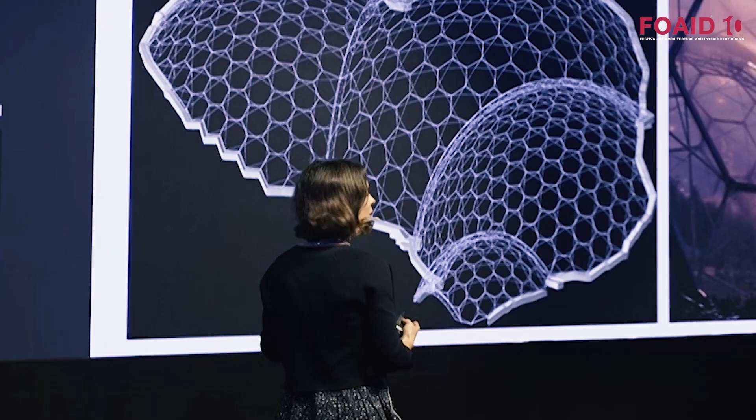The idea for the Eden biomes was very much, and it's actually really explicit of how Grimshaw work, in taking a very constraints-led approach, starting from basic principles and moving on to come with an idea which is again born out of the function and the needs of the building. And in fact, Grimshaw as an office has made a pledge to try and make all our projects net zero carbon by 2030.

I've been with Grimshaw since 2011, and Grimshaw is, as many of you might know, an international global architectural company. We have offices in Australia, in New York, in the US, and also in Dubai and in Paris, as well as the key office being in London.

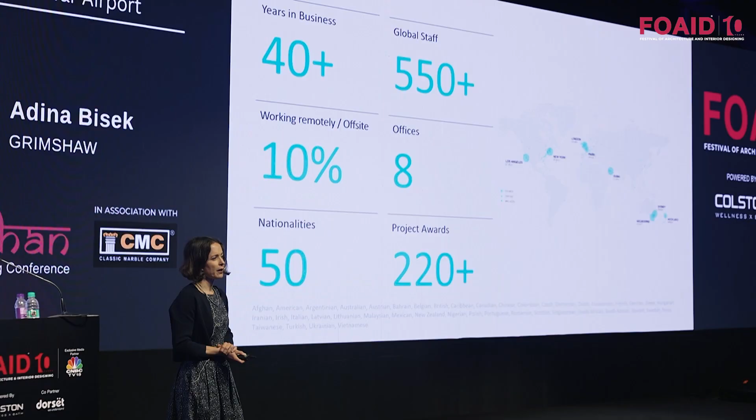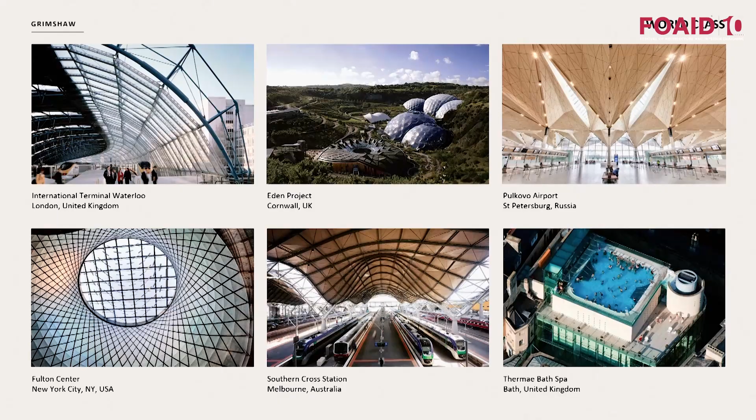We've got about 550 staff, and really the focus of the company very much is the creation of high quality, world-class projects. These arise from collaborative working. We really believe as architects that we can design buildings together, collaborative working, contextual responses, and really driving forward innovation in design. We approach our projects with the idea that we have to find unique solutions to all the different challenges that they pose us.

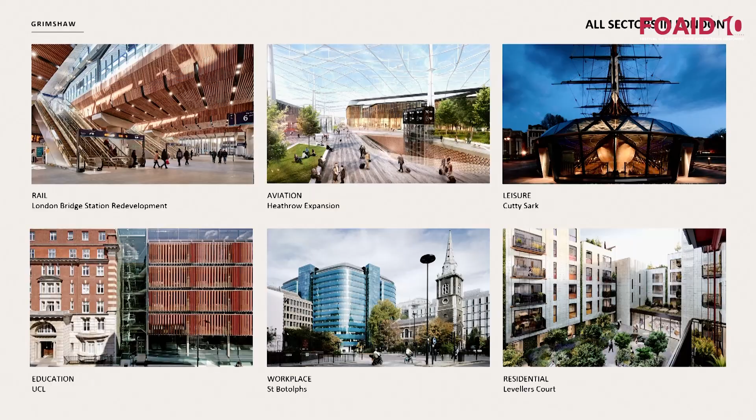And obviously, Grimshaw is a multifaceted company. We work across different scales of projects, different sectors as well, and different typologies. And here are just some of these examples.

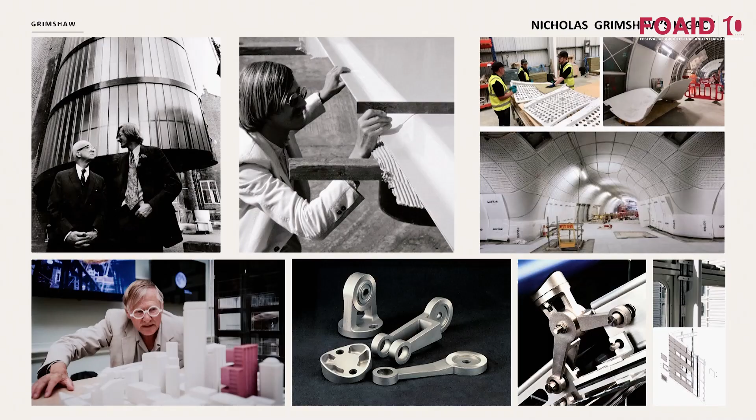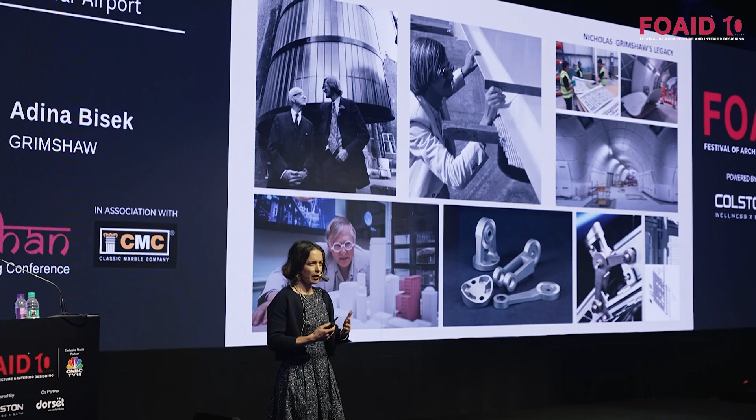Now, all of this really comes from Nicholas Grimshaw. He's the founder of the practice. Nick had a real sense of the technical, the functional aspect of design. He really felt that buildings should demonstrate their purpose, that they should be explicit in what they stand for and the purpose that they fulfill. And then the idea was that form follows on from function.

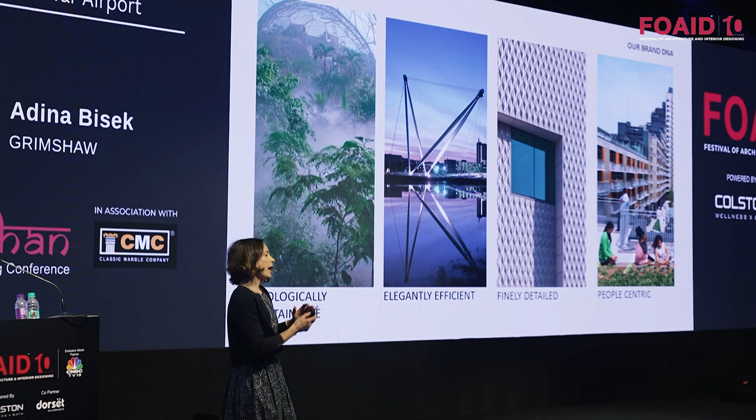You can see, obviously, Nick has retired now, and these are just some images of the time when he was very much the key architect and very much involved in the business. From Nick's ideology has come forward our brand DNA, our approach to design.

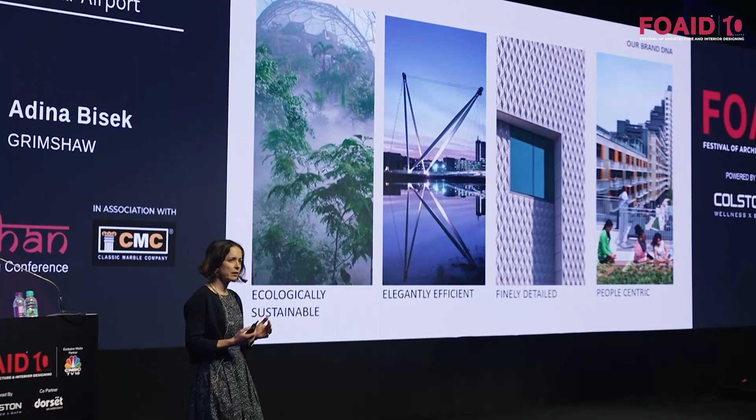First and foremost is obviously the idea that buildings have to be ecologically sustainable. In this time of climate emergency, we absolutely cannot ignore sustainability, ensuring that buildings are foremost really achieving net zero carbon. In fact, Grimshaw as an office we've made a pledge to try and make all our projects net zero carbon by 2030.

Next is the idea of making buildings which are elegantly efficient, ensuring, again, going back to Nick's ideology about ensuring that they are very much performing to the best of their ability and being elegant about it. That elegance in design very much comes from the finely detailed aspect. When we look at design, we consider all aspects of that building in very, very careful detail, and that starts to show in our final projects.

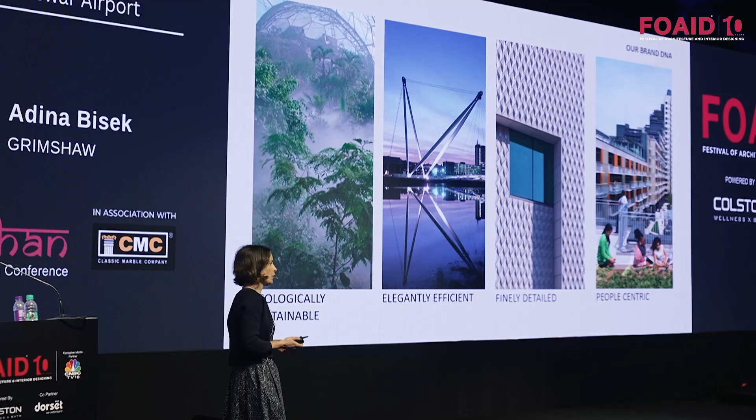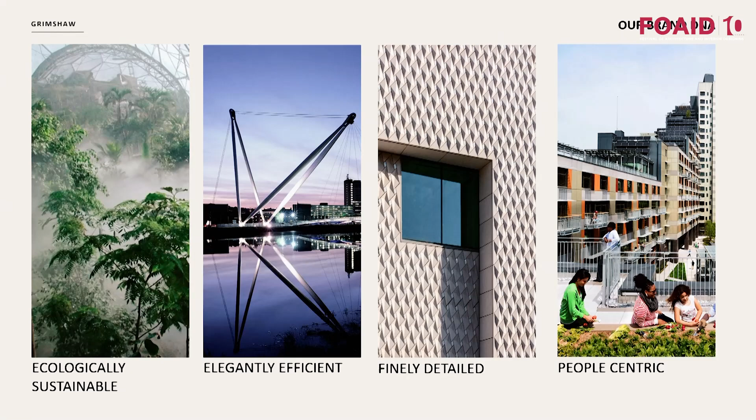And mostly, and in fact just going back to what Rob said this morning, people are critical to our projects. All our projects are people-centric. We need to make sure that we have the sense of the user, the end user, in mind at the time when we design. So these are the sort of key ethos of the company.

And obviously within there, this idea of infrastructure and place. Infrastructure and place also has a sort of sense of global and localism in there. Global because the provision of infrastructure is so paramount to projects, to ensure that they perform to the highest of their ability and making sure that they have all the provision of services that they need, but then taking that science of building and then making it very local and place-specific. And that's what gives that kind of unique quality to architecture and to buildings as well.

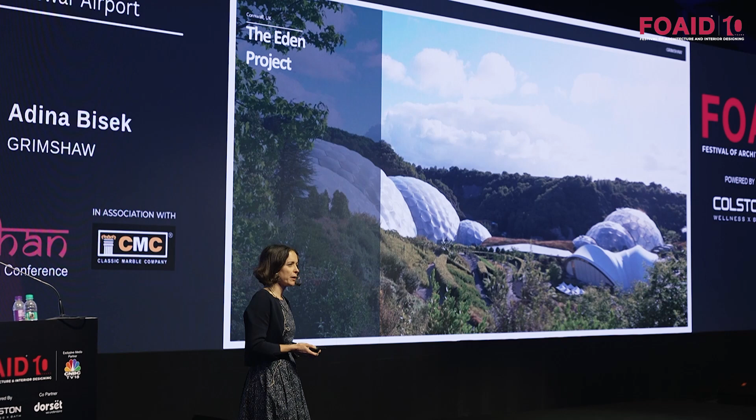And that's what I want to focus on today, and I will clearly demonstrate this from two projects. The first one obviously being Eden. I don't know how many of you know it, it's obviously now a very iconic, it's an old project. It was built in the 90s, but it has really been a signature project for Grimshaw.

Now, the Eden project, if you essentially think what is it? It is essentially a greenhouse for plants. When the client came to us, what they wanted was a place for global biodiversity, a place where plants could be exhibited, a place to entertain and to educate as well. But more than that, they wanted two biomes, one to have the humid rainforest plants, and the other for Mediterranean temperate plants. They also wanted another enclosure which was more open for temperate plants. So the idea was to have these enclosures to exhibit plants, to educate and to entertain.

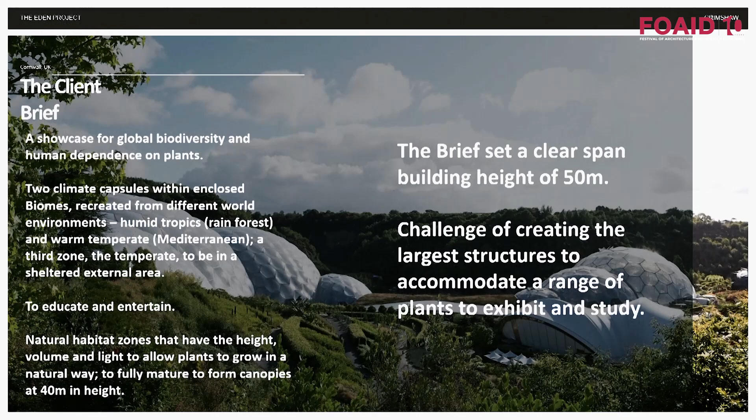But more than that, what the client wanted was for the plants to reach their full height in their maturity, and that was essentially designing to accommodate something which could have a canopy size of about 40 meters. That set the parameters for our building size to be about 50 meters, which meant that we were looking to design one of the biggest glass houses in the world at that time.

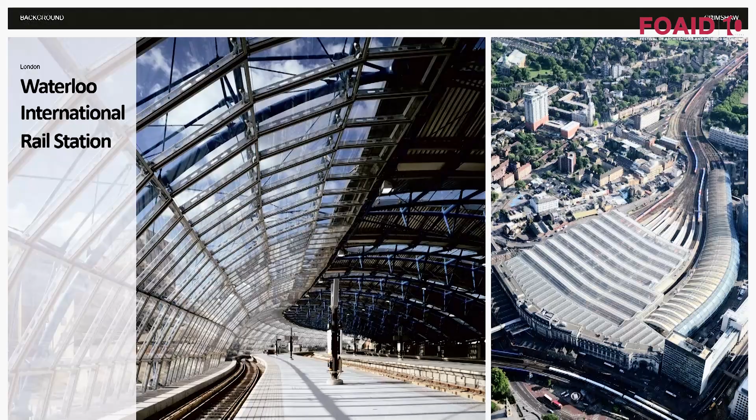Keeping that challenge in mind, the client also came to us because at that time we had just finished the completion of the Waterloo International Rail Station in London, which was the first Eurostar gateway to the UK from Europe. This was a real icon for railway architecture, signifying a new renaissance for high-speed links and a gateway to the UK.

The challenge there had been to create this sinuous roof form which would follow the track alignments. Working with engineers, we developed a glass size that we were able to repeat across the sinuous form, creating this kind of snake-like structure.

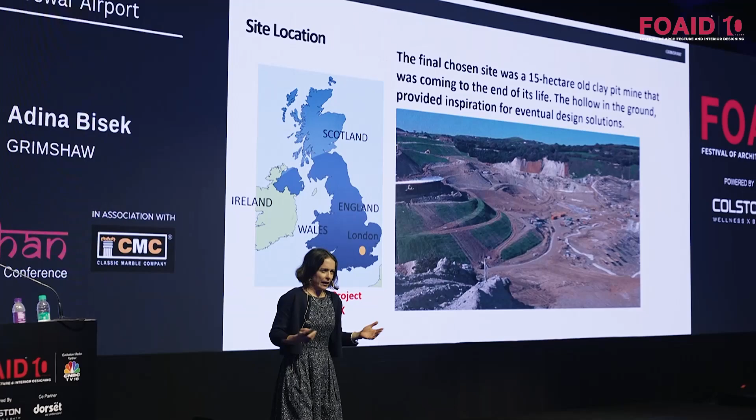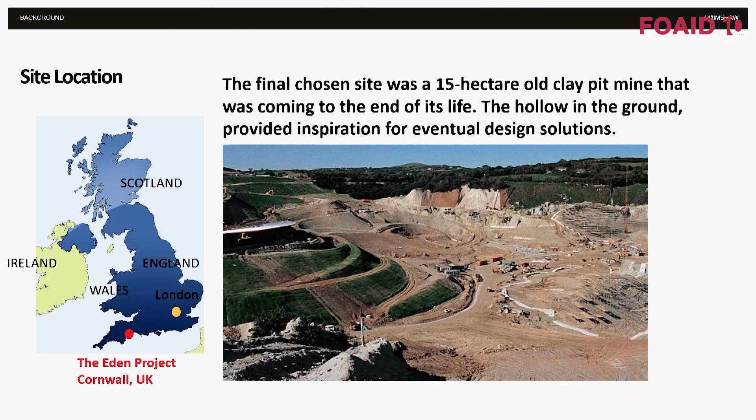So the client took that and wanted it to be a prototype for the biomes at Eden. They went through a site selection process before they came to us, and eventually chose this particular site in the west of the country near St. Austell. This was actually an old clay mining pit coming to the end of its life, and the idea was this would create a fantastic place for the Eden project.

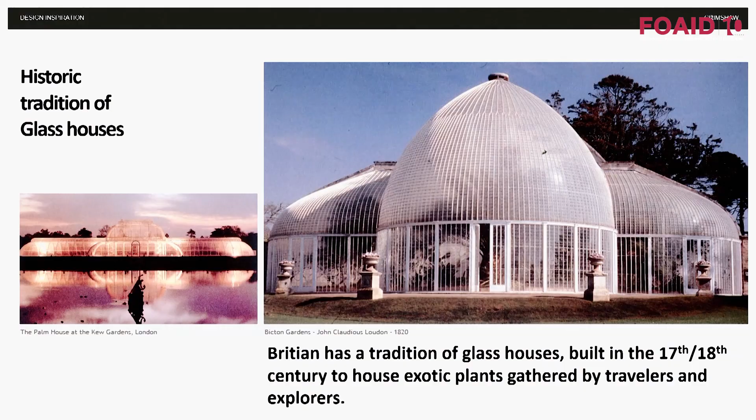So we took inspiration from that hollow in the ground and went back to first principles, starting to understand the evolution of greenhouses or glass houses in the world. We went back in time to the 17th, 18th century, when glass houses first came to being.

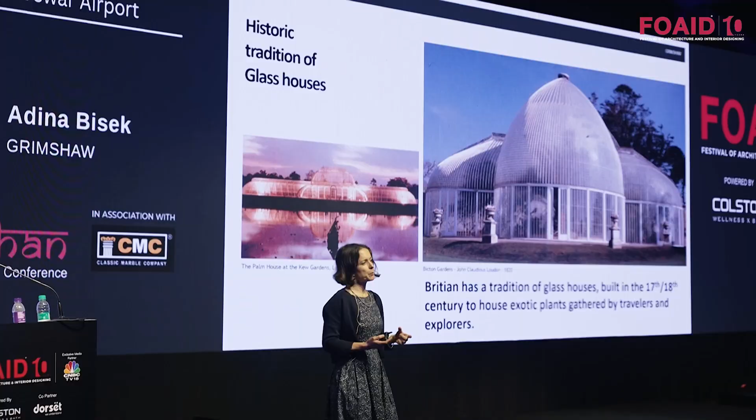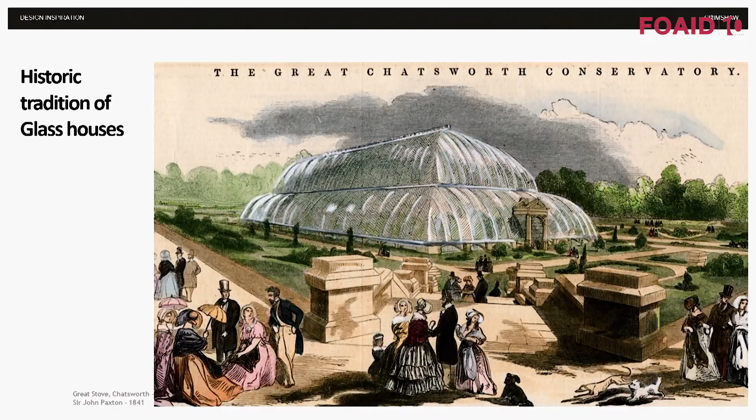This was the time when explorers and adventurers were going out exploring the world and bringing back tropical plants to the UK, which had to be housed in very protective environments. This one is in Chatsworth by Joseph Paxton, built with wood and glass. Paxton was particularly known for industrializing this process, looking at ways it could be prefabricated, and at economies and speed of construction.

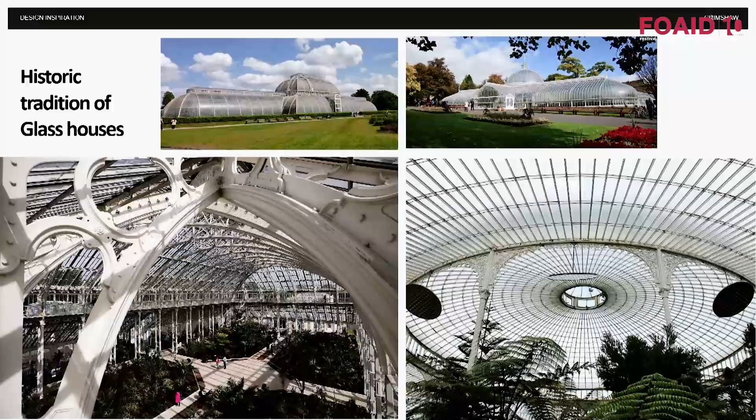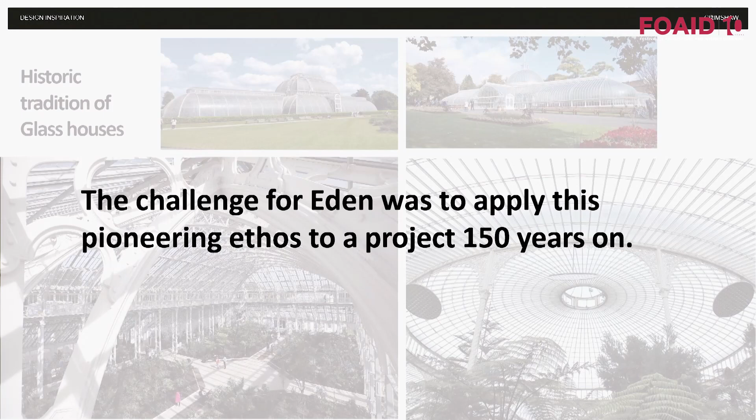In industrial times, wood was replaced by steel, so you started getting steel, iron and glass structures like the ones you see here - famous examples like the Palm House in Kew Gardens and the Kibble Palace in Glasgow. These are beautiful, large structures with beautiful quality of light, and they became icons at that age. So the challenge for us was how to create the next typology of greenhouse, taking on that tradition the Victorians had set 150 years before.

As we all do, we looked at the site for inspiration, and this was not an easy site. At the time the designers were looking at it, it was at the end of its life, so the topography was still changing. But we thought it would be nice to create these biomes using the walls of the site as part of the architecture, working the site with the architecture, and going back to Waterloo to see how those arches could be married into a structure.

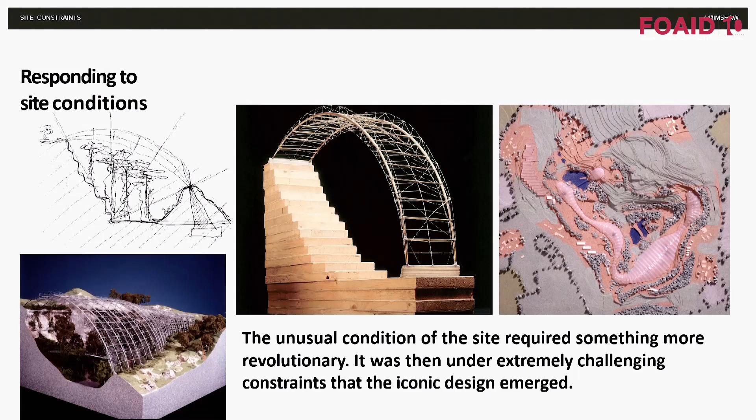You can see this is one of the plans which was coming up at that time, with this kind of sinuous quality.

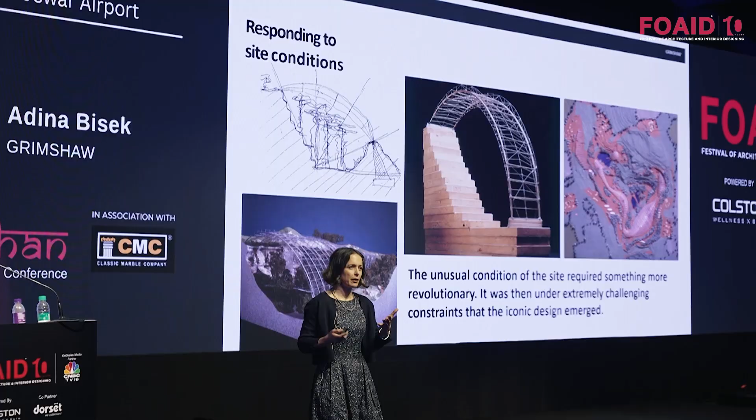But a major challenge was that because the site was still changing, we needed something much more flexible and something which could also be logistically transported to Cornwall. The steel trusses we had used in Waterloo were basically too heavy to be transported.

Inspiration, influences and ideas come from various places, and the teams had been encouraged by this film from the 1970s called Silent Running. In the film, they have these lightweight biomes which float in space, and we thought - can we make something as lightweight as that?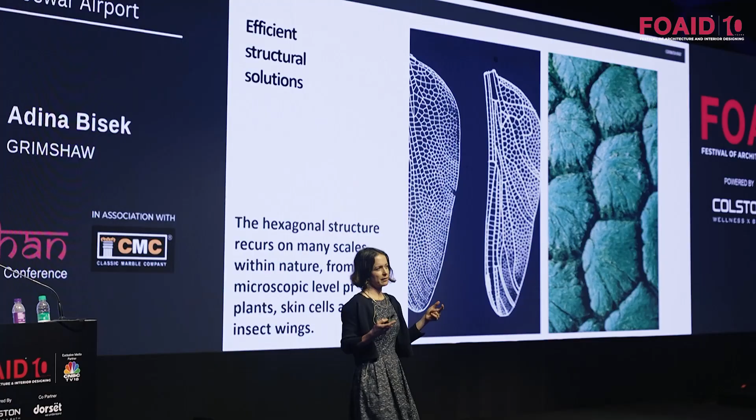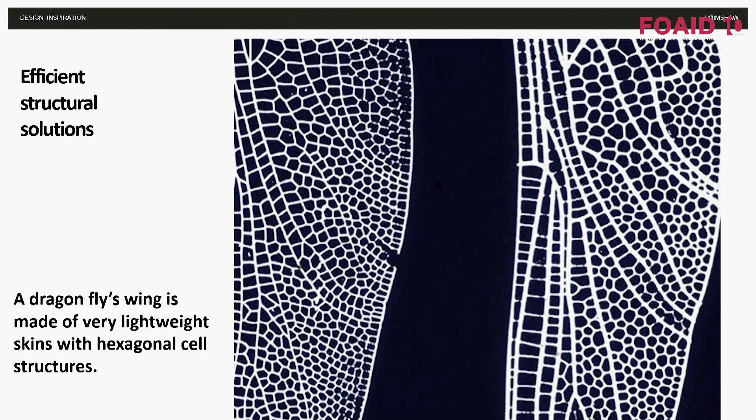Nature can also be a fantastic place for inspiration, especially if you look at honeycombs. The hexagonal structures are really robust, with careful use of resource and minimum use of energy. These hexagonal structures exist across many scales, from microscopic organisms all the way to insect wings. Especially when you look at dragonfly wings, you see the hexagonal structure, and the way it's attached to the primary structure is also at right angles, which was really critical for us in developing that structure for the biomes.

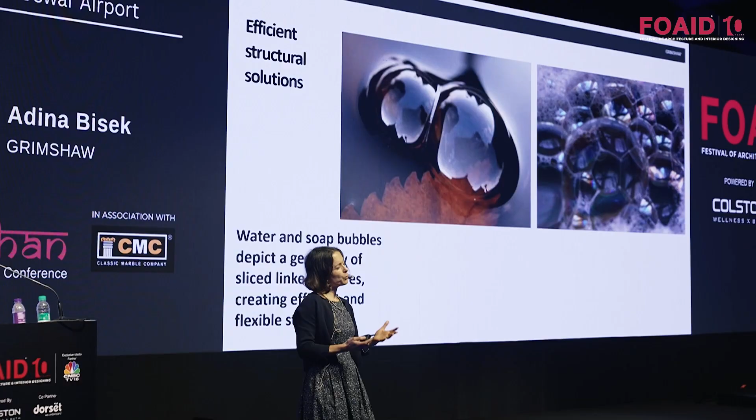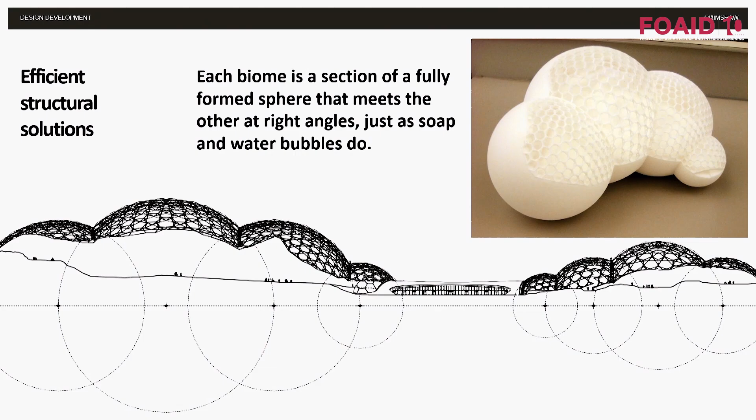Sometimes you can get inspired by water and soap bubbles. When you look at water and soap, the structure is actually partially sliced spheres which come together and attach each other at right angles, and this started to give a sense of what the biomes could actually look like. So here you can see how the biomes are cut slices of spheres which come together and attach at right angles. The seam where they're attached is the critical bit of the structure taking the load, allowing the rest of the biome structure to be really lightweight.

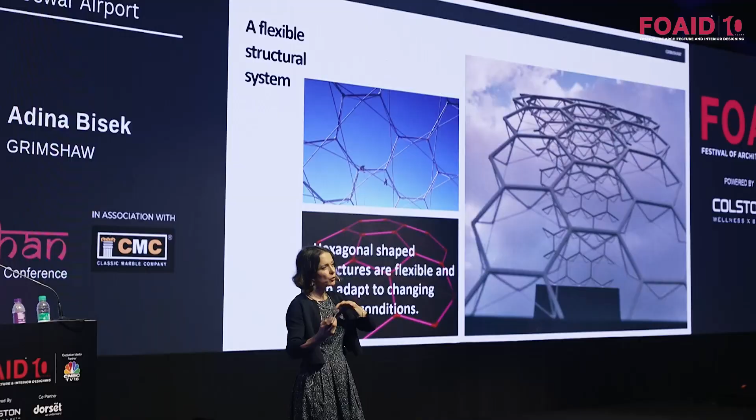The structure itself is still hexagonal, inspired by honeycombs. This allowed for a very flexible structural system, which could also adapt to changing loading variations, and could move as the site was coming to its final shape.

That is how the idea for the Eden biomes came about. It's really explicit of how Grimshaw works, taking a very constraints-led approach, starting from basic principles and moving on to an idea born out of the function and needs of the building.

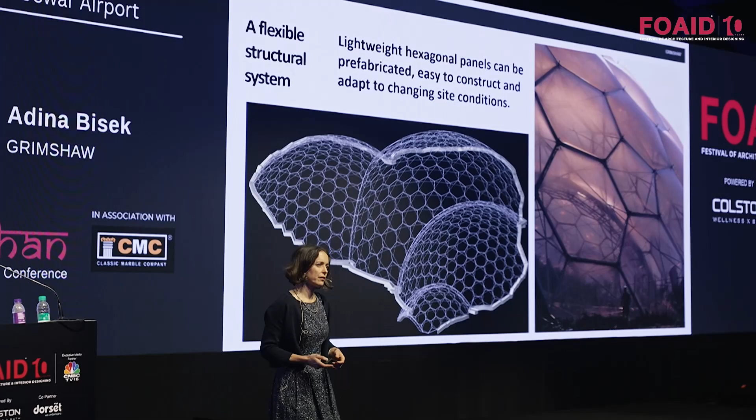These panels are prefabricated, easy to construct and transport, and they started to create the eventual biome. The other thing was the skin of the biome - we did not want to use glass, so we started looking at alternatives, one of them was ETFE.

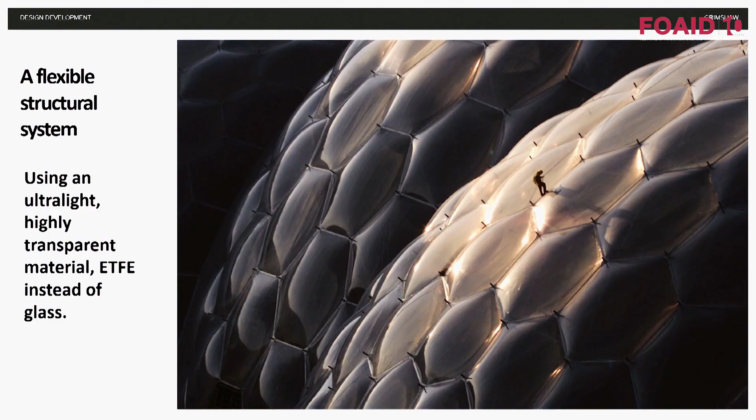So that was how we gave shape and thought about the structure of the biomes. But the critical question was, how do you place it on the site?

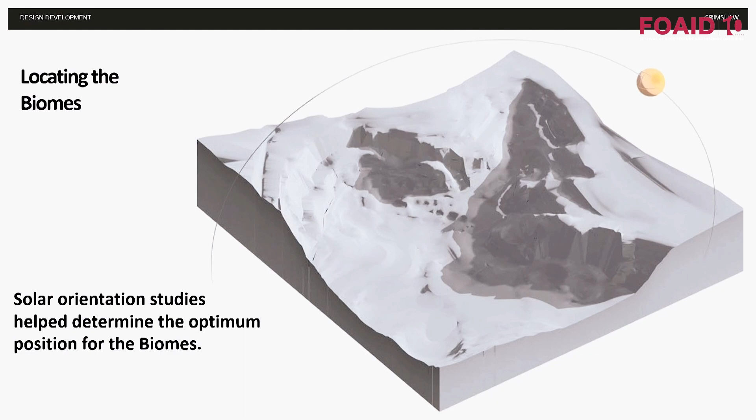At that time, before BIM, we made a 3D model and started doing sun analysis to see where the optimum place was for the biomes to be located, and to understand the shape of the biomes and how they could be layered onto the site.

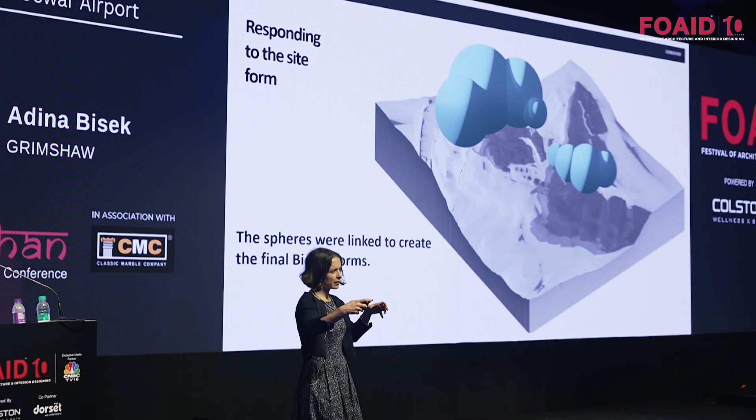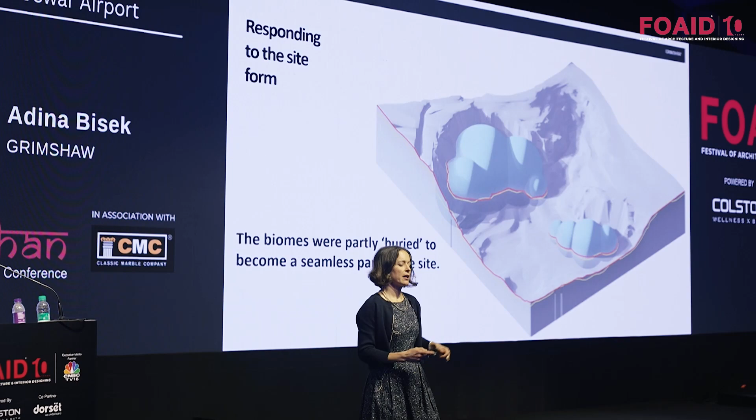Then we started putting the biomes together, really reflecting the shape of soap bubbles, and started placing them on the site. You can see how they get submerged and seamlessly follow the topography of the site.

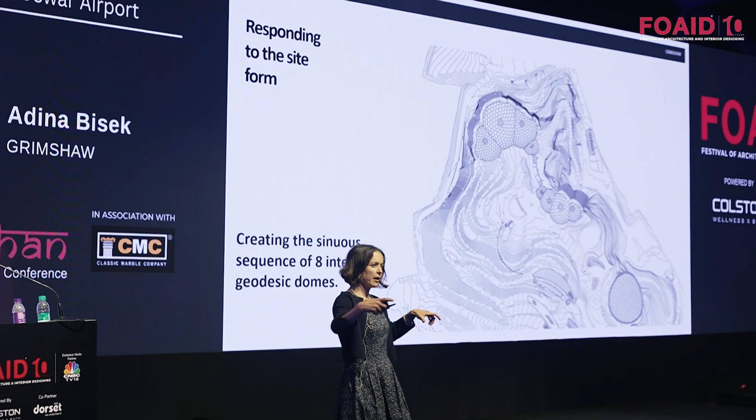The idea was that one set would be for humid rainforest plants and the other for Mediterranean temperate typologies. Together they became this link of 8 geodesic domes that organized the full master plan for the Eden project.

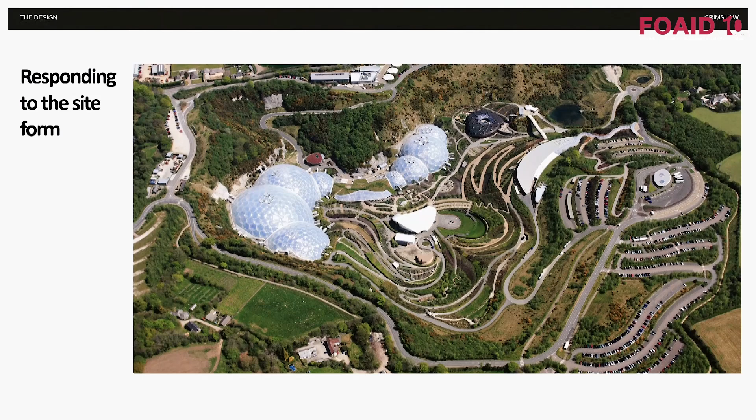Alongside this, there were other ancillary functions. There was a visitor center located higher on the site, which allowed for a fantastic view as you came in - it was the gateway to the Eden project and also housed many of the ancillary functions.

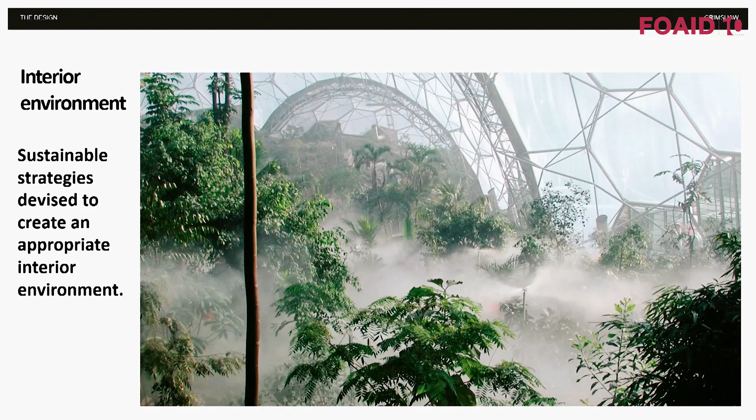Inside, in creating that optimum environment, we looked at many sustainable strategies, especially for heating, using passive and cooling methods, as well as recycling water. There's a whole host of strategies creating that internal optimum environment.

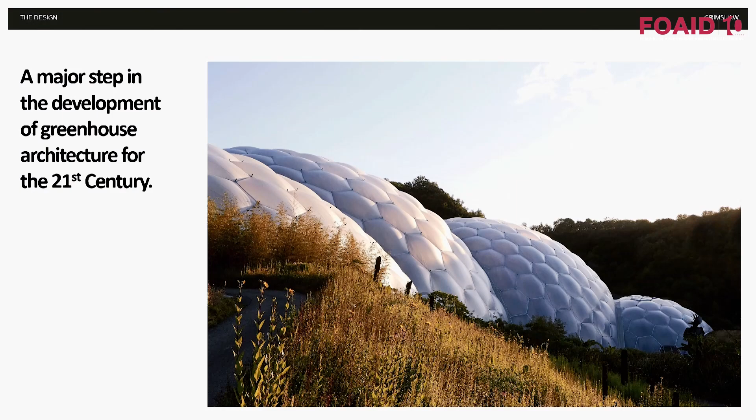So there you have it - that's the Eden project. It did eventually prove to be a major step in greenhouse architecture, taking on the tradition set by the Victorians 150 years ago, and it has become a true iconic development, a true iconic project, and has been the stage for world events.

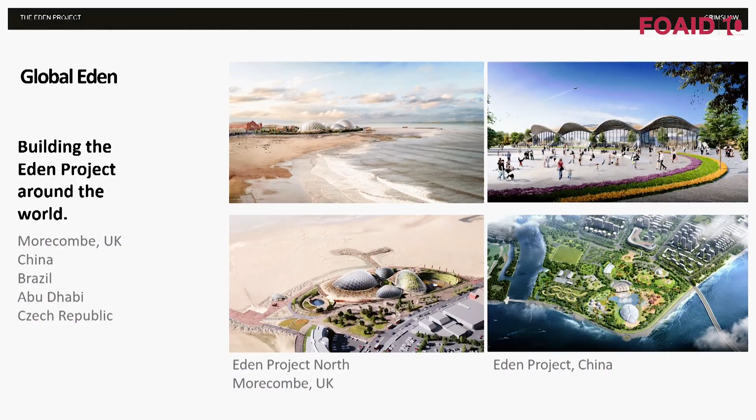With the success of the project, the idea is that there are Edens coming across the world. We've done one more in the north of England. There's one being constructed in China, and we are now testing having Edens in the Czech Republic, in Brazil, and also in Abu Dhabi. So watch this space for more Edens.

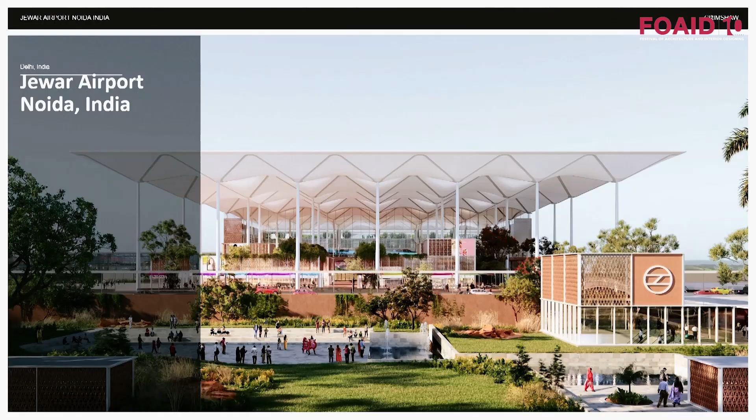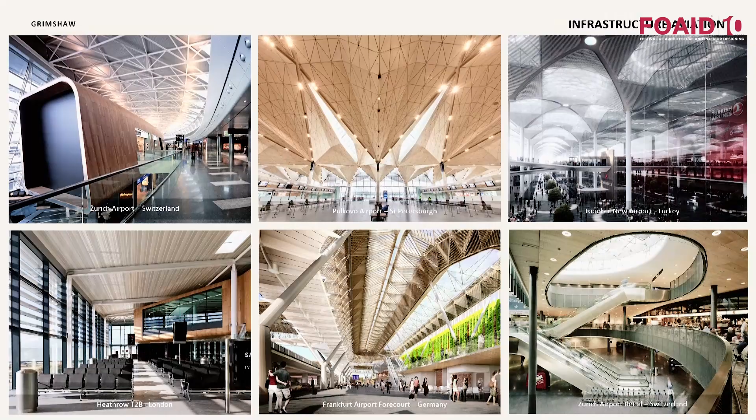From Eden, I'm going to move swiftly on to the Jewar Airport, Noida - another iconic project, very colorful and flamboyant. Airports are one of the building typologies that Grimshaw have really looked at and designed a few. We are experts in understanding airport operations and functionality.

Creating those kind of unique buildings, unique airports, really comes from making them very place-specific. That's why we like to really understand the culture of the places we are designing for, to ensure these fairly large infrastructure projects become very contextual.

So this is, again, the Noida Airport. Going back to first principles and really looking at inspiration, one of the places we were looking at was very much the industrial buildings in India.

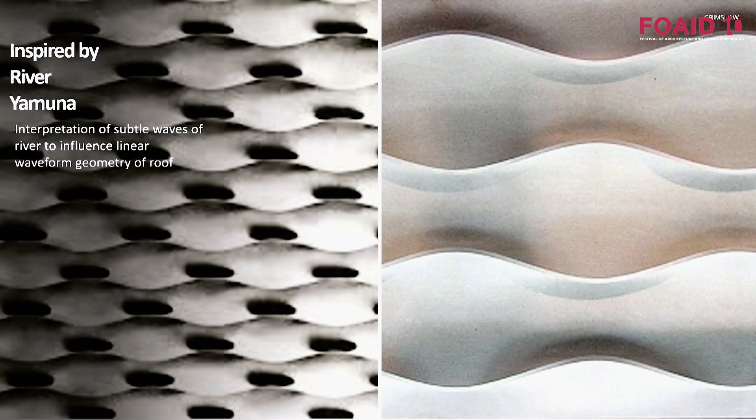Obviously, looking at the context, you've got the river Yamuna, and the waters and flowing of the river also served to inform the geometry of the roof form and the soffit of the airport, very much inspired by the river.

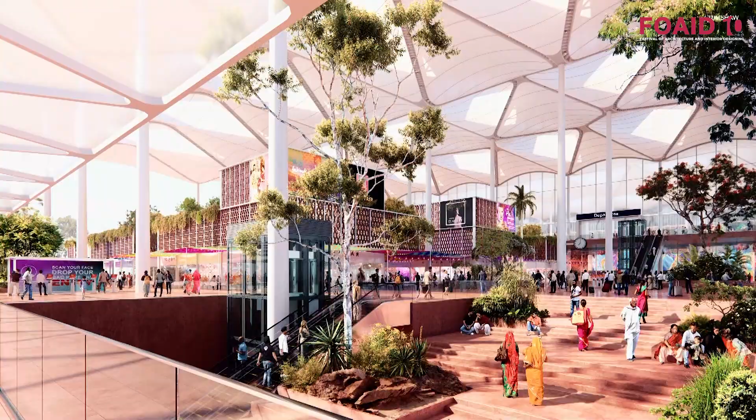The cultures and traditions of India, the colors, the festivals, we really wanted to capture that. The airport is going to be a key space for arrival for people from across the world, so we wanted to get a sense of India as you arrive. This was a key focus for the airport, the forecourt, and all our ideas culminated in its design.

We actually won this project through a competition, and this was the competition winning image, so to say.

This forecourt was twofold: one, an area for arriving and departing passengers, very much a place of transition, but also a key destination as a multi-purpose space where people could have events and markets could be held.

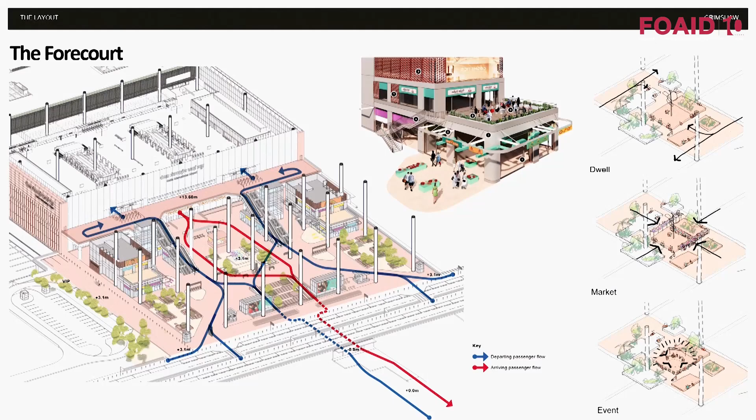You can see the forecourt is designed with landscape, planting, and water bodies to help cool down the space, while keeping fixed functions alongside spaces for a multitude of other activities. The landscape doesn't just sit at the forecourt, it stretches out and connects to the parking as well.

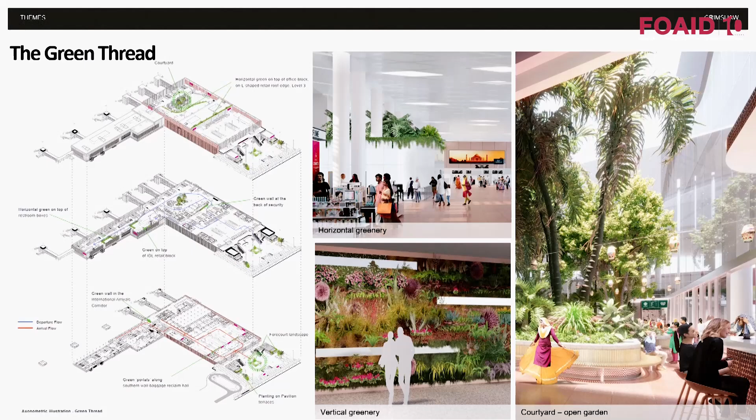So there's a real greening strategy for this place, and that green thread extends into the airport as well. There will be vertical and horizontal planting applied across the different spaces to humanize and bring down the scale of those airport spaces, making it feel much more pleasant.

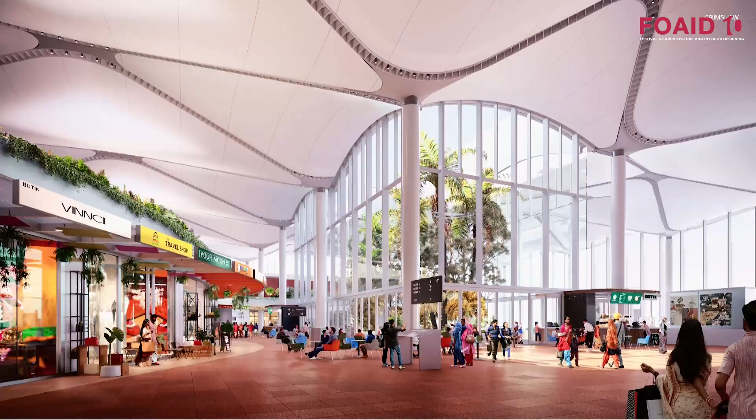All of that green eventually culminates into the courtyard, again reflecting traditional architecture and the sense of a courtyard, bringing that typology into airports with a central space that has the flexibility to be openable at times when the weather is pleasant, allowing for a much more open airport environment.

Other themes we thought about were textures and patterns. There's a lot of talk about interior design, and Indian architecture and culture feature a multitude of patterns that we wanted to bring into the airport, particularly through the use of jalis, to humanize the space and make it feel homely and human scale, so people feel really welcome when they come to the airport.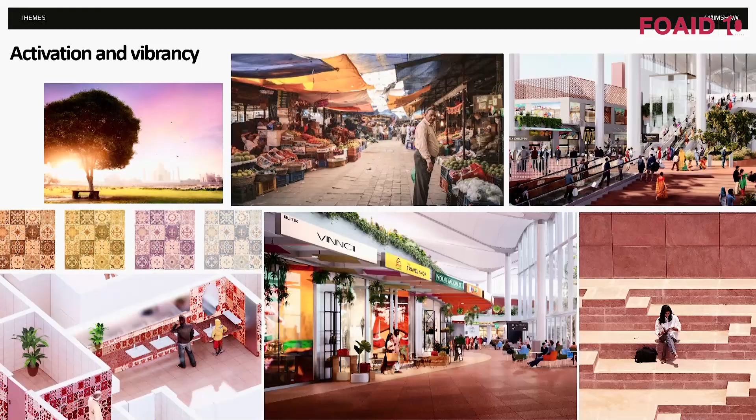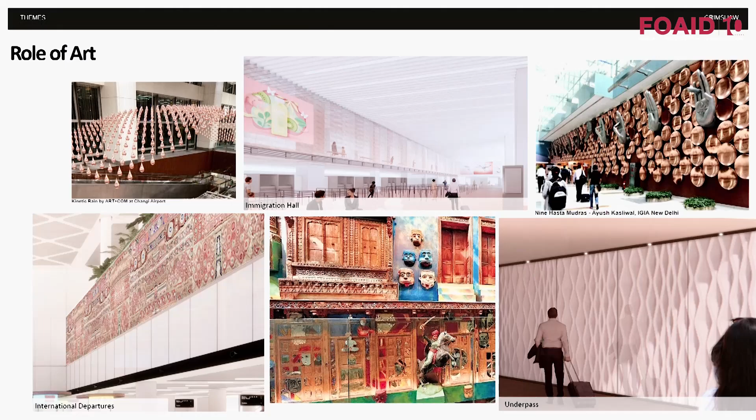Obviously we worked in activation and vibrancy as well, and one key aspect has been the role of art. As architects, we don't design art, but we identified locations across the airport where you could commission artists and have Indian art displayed as part of the airport interiors.

All of this comes and culminates again in that same forecourt, and the design works at different levels. Whether you're an arriving or departing passenger, you can appreciate the space through and across different scales. It's not a static space - it's got retail, but also flexibility in how the spaces can be used.

What we were also very conscious of, as many of you would have experienced, is that there's a lot of activity at the airport threshold in India. These are sometimes chaotic but very busy places with interchange, people coming and going, and a lot of emotions being played out. So we felt it was really important for an Indian airport to have that forecourt where you could have space to breathe and play out all those emotions and activities.

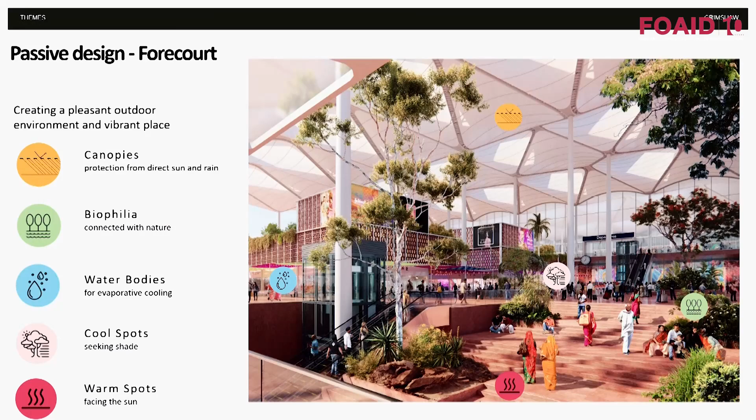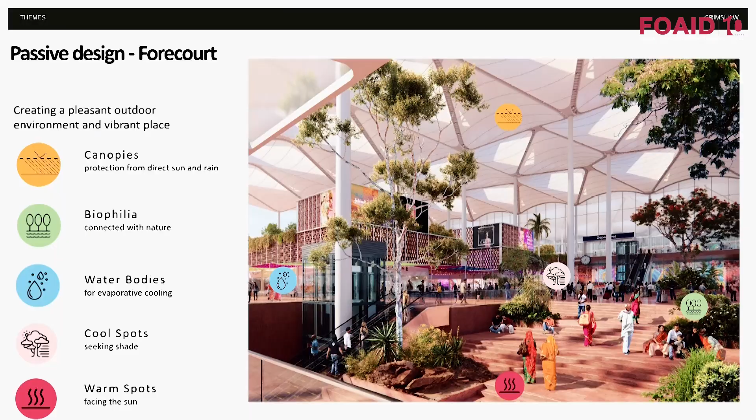Now, the critical thing about the forecourt is it's actually an outdoor space, just covered by the iconic roof. So it's been fairly critical to look at passive forms of cooling included within the design to create a much more ambient and comfortable space. Some of these include the canopy itself, biophilia, bringing in different landscape and water bodies, trying to identify cooler and warmer spots, building in passive cooling systems and making sure the airport can be as sustainable as possible.

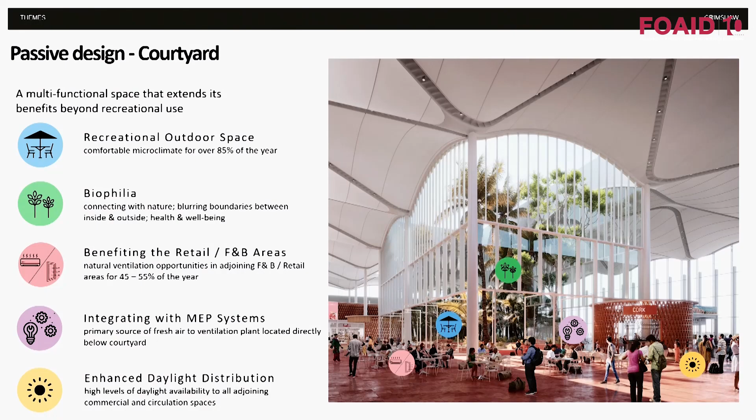And reflecting that very much within the courtyard as well, similarly applying more traditional forms of cooling so that the airport can be very energy efficient.

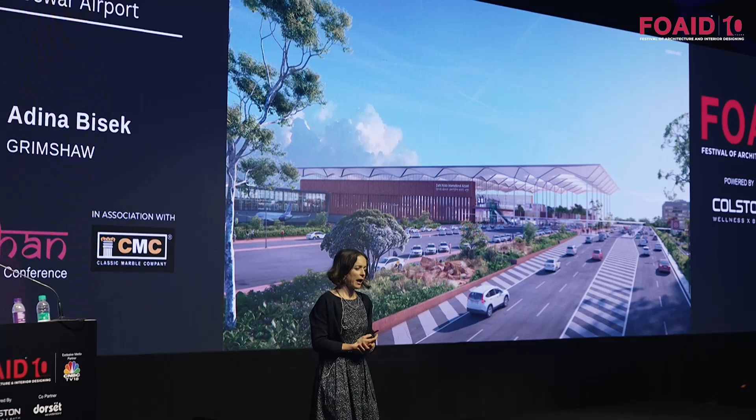So that's the critical design and how it's starting to play out. It's under construction at the moment, and it's meant to be operational in a year or so. It will be the new airport for Delhi, for Noida, and for India as well.